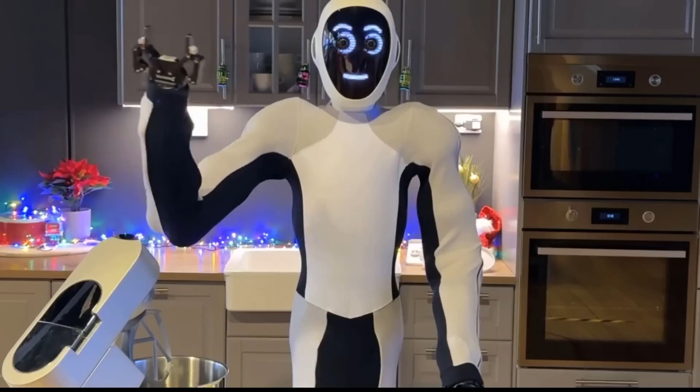A humanoid robot company backed by OpenAI called 1X Technologies just announced a breakthrough showing their robots can now do tasks autonomously. Its robot named Eve can now take more actions thanks to special neural networks, which allow the bots to learn by watching videos of people doing activities. From this, Eve learns to copy the activities on its own without needing complex programming. What's very interesting and exciting is it only took 30 Eve robots to train the bots to do these tasks autonomously. How big of a deal is this?

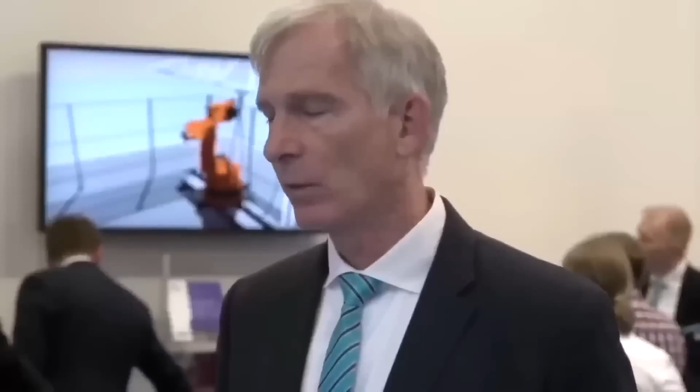So every week almost, we do a bot video. We're seeing these bots, all of them, continue to drop videos showing that they can now learn things autonomously. This is something that seems to be happening more and more.

So here's the news, right? 1X, they are a Norwegian company, right? From Norway. Funded $100 million, of which one of their funders is OpenAI. And they dropped this and they just said: all neural networks, all autonomous, all 1X speed. They didn't speed it up. This is all autonomous. There's no teleoperation in this video. They had trained it to do all these tasks.

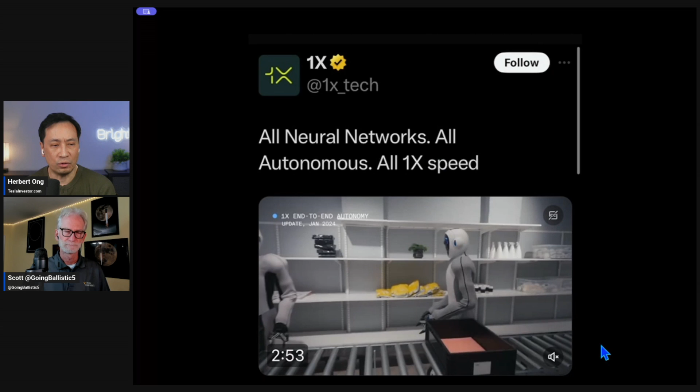And this is Eric Jang, he's the lead VP of engineering for that company. And he said, every behavior you see in this video is controlled from pixels to actions with a single neural net architecture. So there's no coding. This neural net learned it on its own after it was given videos and teleoperations. Now in this video, there's no teleoperations, no scripted replay or task-specific code, no CGI, all in one continuous video shot. I'm going to go ahead and play this video, and while I do, please tell us what we're watching.

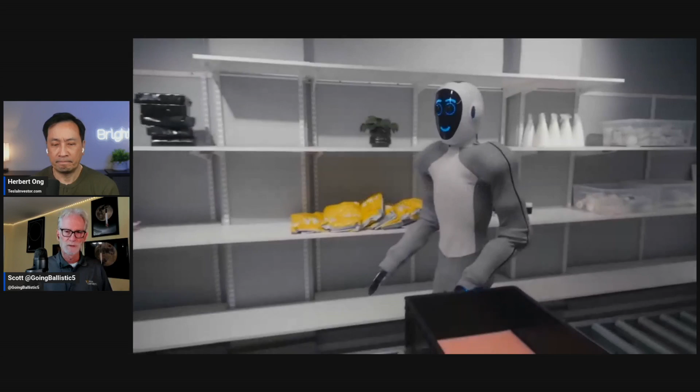Okay, so the first thing you see here is a very simple operation of being able to move parcels in and out of different pallets on a conveyor system, get an idea of the functionality, reasonably smooth, and you see it's got the mobility that's needed for a task. Now, if you just pause for a second right here, the first question that came into my mind was, oh, okay, I see just a couple of bots. But then as the shot turned around, it's like, wait a minute, we're seeing a lot of bots here. So what we want to do is get an idea of how many unique robots there seem to be out here that they are using to train, because this is probably one of the largest collections of humanoid bots that we have seen in one location.

And that's very important to the training sets. So the other thing I want you to notice about the operations is that what they're doing requires a lot of turning your back and going in another direction. So it's not like everything is just shifting a little bit to the left or right, but they've got to turn around, get something with the back, come back and forth. And as I've looked at the mobility of a lot of the humanoid bots that are bipedal, a lot of them have not convinced me they can turn really quickly.

They are still kind of slow going straight ahead, but they seem to be slower when it comes to being able to turn. So in this case, having a mobile base, which is wheeled, they're able to do that movement a lot quicker than you're normally able to do. And of course, it makes it a lot easier for them to do the mobility and the navigation that's needed for a humanoid bot. So they've decided, okay, we're going to forego figuring out how to do the walking bit first, and let's work on having a mobile base. Now that limits you, right? It means you have to be on a level floor the whole time. So let's continue on, let's take a look.

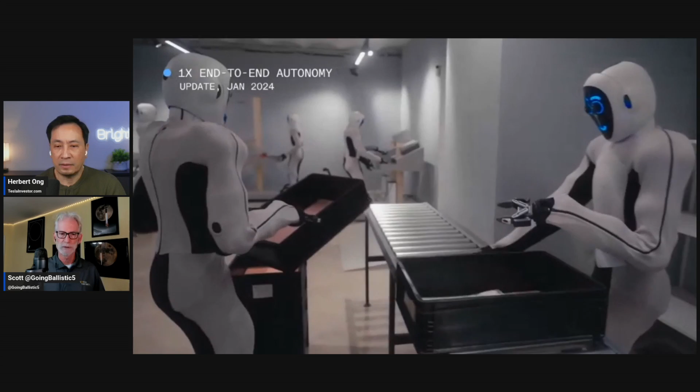So we'll go ahead, we can see they're learning to do those operations. Now if you pause for a second, I just said aha, a level floor, right? Well, you can put ramps in here and it's able to go up and down ramps. So you won't be able to have steps, but you might be able to reconfigure your environment to have slight ramps like this if it needs to go up and down.

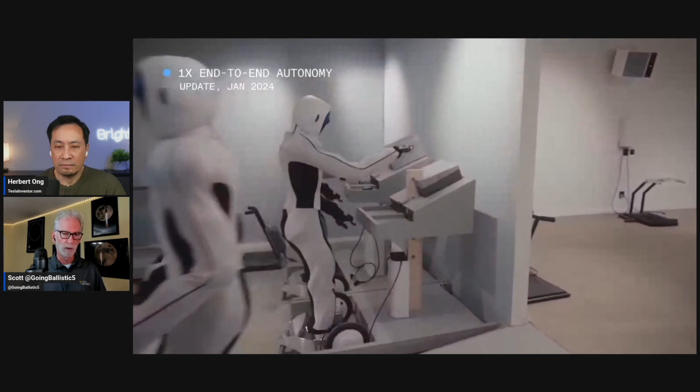And we see later on there's elevators, so there may be a lot of situations where it's okay to have robots that are on wheels moving around. It doesn't require as much power. And you see they've got kind of a clever solution that I'd refer to as being kind of like a snowboarder. Your feet are kind of trapped in there, but you still can go up and down if you need to, which we're going to see here.

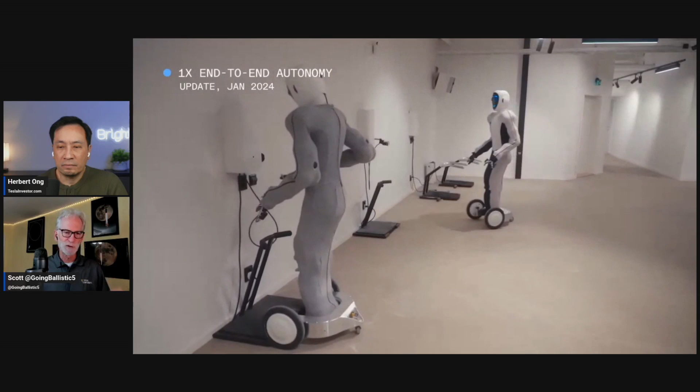So at first, everyone thought like I did, it's like, oh, they're over there doing spinning or working out, right? No, they actually are recharging and they're able to plug themselves in and out, and you can see they can use the legs to adjust the height as necessary.

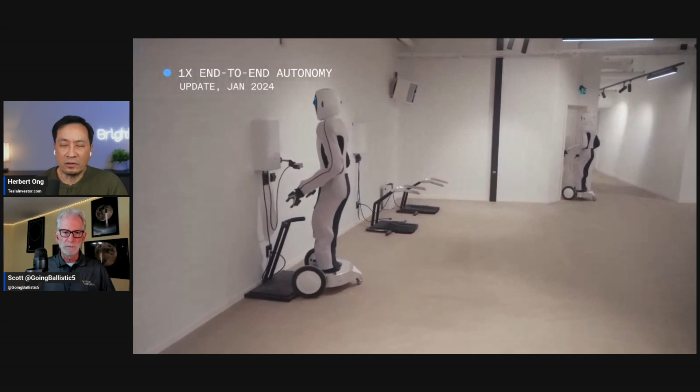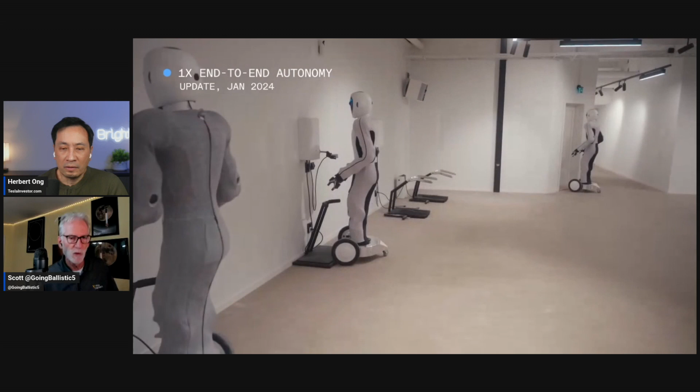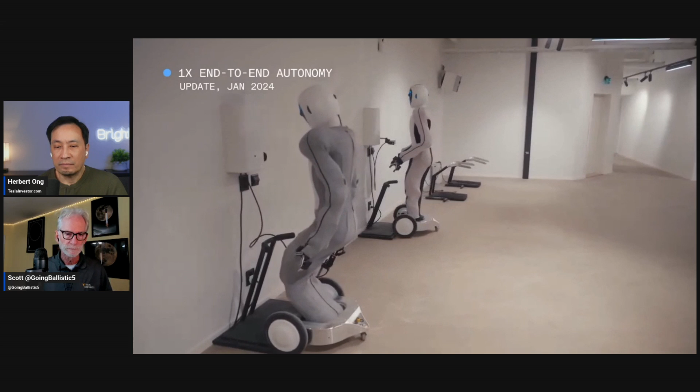What are they plugging into? It looks like just a standard outlet. Is it the hip? It's hard to tell whether there was something down on the base of it. I'm not sure if it's plugging in at the base of the wheels or whether there's somewhere else on there. But I had a feeling it's down low because that might be where the battery pack is. That would make sense, to probably put your battery pack down low because that means your center of mass is really low, and so you have a lot more stability that way. So there might be something down there. Yeah, it looks like something is clipped in down there in the bottom, by the wheel.

So we can see that they're able to self-charge. And then we have another room over here.

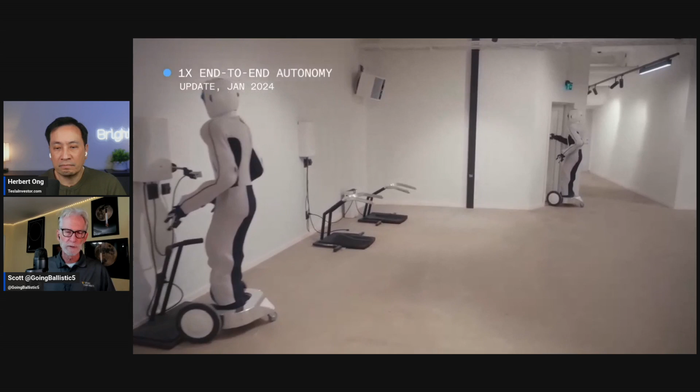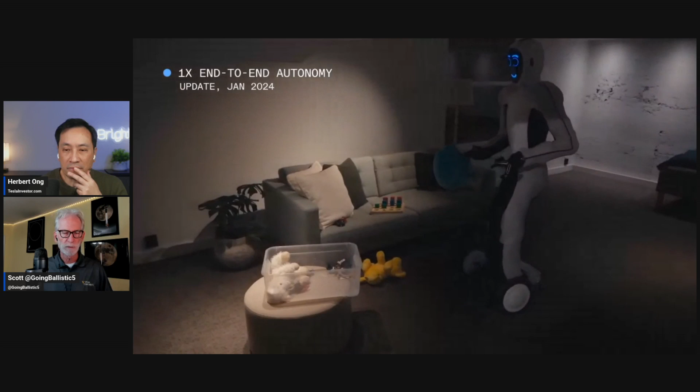We expect they're going to be doing something very simple, and you go in there, and I think there's a little bit of a surprise. It looks a little bit more like a bedroom. If this is the one that I remember, yes, over here. So we have a living room or a bedroom where now we need to pick up things off the floor. So it does show the ability to go down because it is partially legged, even if it's not using the legs to walk, to identify different objects.

And again, they're saying this is end to end, pixels in, motion out. So they've probably also figured out some of the same tricks that a lot of the other AI companies have regarding VLMs being able to do training with vision language models of, like they said, video in for training sets. And a lot of different tasks that we see going on here.

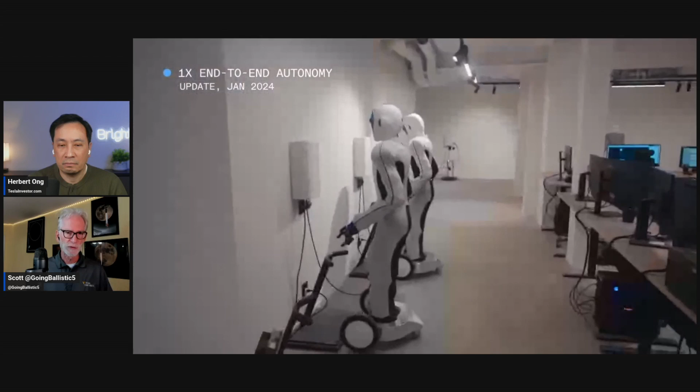I think over there it was going up on an elevator. Again, we can see some of these doorways have ramps on them to allow them to go up and down as necessary. Actually, I'm not surprised to see these ramps because in Scandinavian countries, a lot of the offices, the way they're set up, they usually have a little step in between to prevent drafts because it gets very cold. So you get used to that, like when I'm in Finland, Sweden, walking around, sometimes you almost trip going through the doorway. So they probably had to make a ramp just for that in many cases.

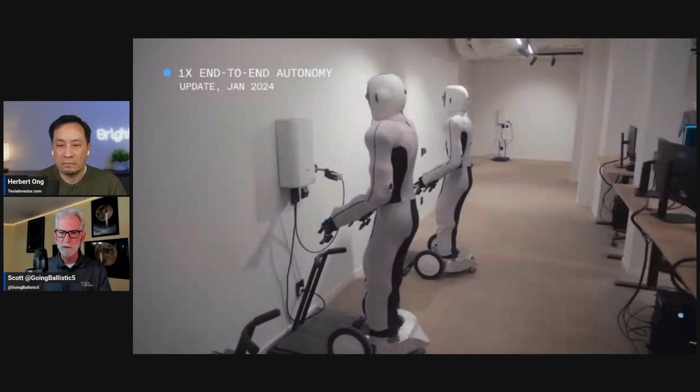Okay, so again we're seeing what looks like another room there, this office space, a lot of chargers around there. So it seems like maybe they need to charge frequently. I don't know how often, how long they can run. But in some of the workstations that we're going to see where they're doing these tasks, they are plugged into the wall. So they are showing us a couple of modes.

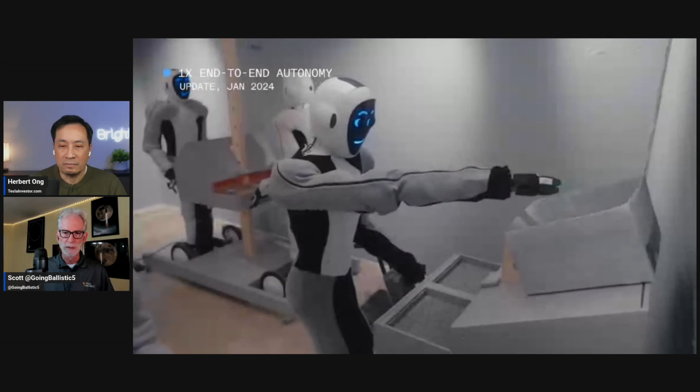One where it's able to run around fully autonomously without being plugged in. And in some cases, I think down here, they may actually be plugged in while they're continuing to do this. This is an interesting kind of what I would just call a Sisyphusian kind of task of constantly rolling the ball uphill and then it only comes back down again. You got to do it again and again and again. But that's where they're getting more and more of the training sets.

And I did make a little pun about the name because I said it was at 1X. And I said, of course, you would expect nothing but 1X from 1X. So I could remember the company name, I kept on getting it X1. It's 1X. Okay, it's 1X. So if you want to remember the company name, that's one way of doing it.

But it's important to see that that is the normal speed. It seems you're not super fast, but let's just say it's able to do the task close to what you would expect from a human. Especially if you're doing the same task repeatedly over an 8-hour day, you're not going to be going full out, full out, full out.

So the first thing I wanted to figure out was, this is the first time we've seen a lot of robots training, because the expectation is you're going to need a lot of real world data to improve your training sets. I counted, I think like 24 robots when I went through that scene, but I wasn't sure how many of them I double counted. I may have double counted anywhere from 4 to 6, so maybe there were 20 unique robots in there. Everyone else can do that at home, go through and see how many you can count. But it is a fairly large number, and it means they are trying to capture that real world data.

If you remember, we had a nice discussion with Suzanne Gildert from Sanctuary last week, where she explained a little bit of the process they're doing. There's a big difference between the simulated data and maybe even the telerobotic data you'd be using in your training sets. Then when you deploy it on the bots, because when you simulate, you're in an artificial environment where the physics are simulated, not real world physics. That means you get close to your solution, but it's not perfect. You need to go out there and refine the model by doing a lot of reinforcement learning on what you learned from the simulation to make the model a little bit better. It looks like that's probably what they're doing there.

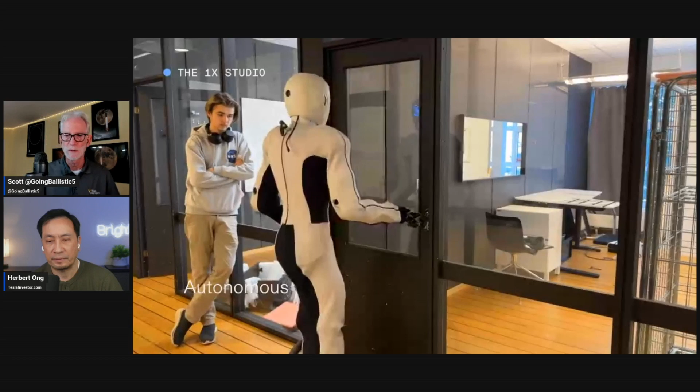So talk a little bit and I will show video of other video that they've dropped in the past. Okay, so I think this is one we saw maybe close to a year or so ago when they first announced their partnership with OpenAI, because no one had really known of 1X except probably people who were very close to it. They were almost in stealth mode, and now we're starting to see more and more of these updates.

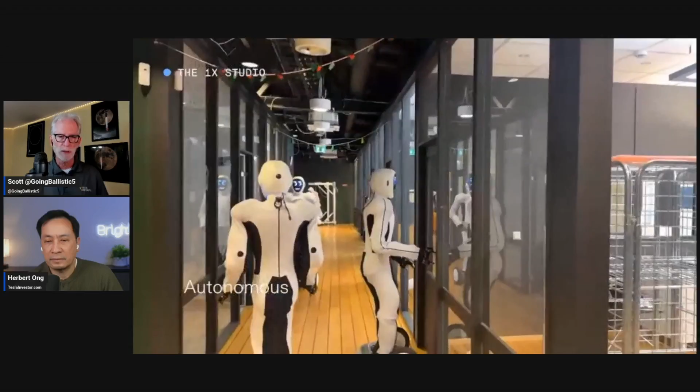Because I've wondered what they've been doing in the past year, and it looks like they're coming up with a similar approach that everyone else is. They're doing end to end. They're beginning to find that the way to train these is also very similar, in that vision in, and then the motor profiles out, and exactly what the actions are supposed to be, with very simple training sets. And it's very similar to the results we're seeing also coming out of Sanctuary, and also I think Figure with the demonstration they did with the Keurig. So they're all beginning to realize it's really feasible to start training these bots.

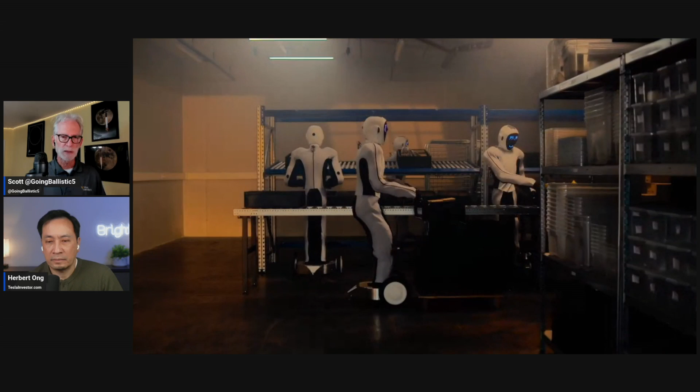And what I think is probably important here is that some people may say, well, okay, it's a very simple bot, it's not really walking and this and that. That's not so important. What's really important is that you can train these things. If you're able to get the brains together, the rest of it is something you can take care of later on. Now, it helps to get something that's maybe closer to the human form factor to be able to do it, but it's probably close enough.

How much effort do you put into the hardware? How much effort do you put into the AI? They put just enough effort into the hardware to start collecting data. And as we can see, it was able to operate in that sort of factory warehouse environment pretty well, going around.

And what we haven't shown there, and what we've seen a couple of posts of, is they have a new robot, which is called Neo—does mean new—that has what looks like fully formed hands and bipedal legs. So it will probably—we haven't seen a demonstration of it walking or anything else. They did show grabbing a coffee cup. So it looks like they finally have that. So they recognize that those old claws, that's not going to be the final form, that maybe the wheels is not going to be the final form, except in some certain limited use cases.

The main thing is that they seem to be coming up with similar results as everyone else. And that excites me to see that they're all being able to say, hey, this approach we're taking seems to be giving pretty good results, and giving us good results very, very rapidly.

Yeah, so they can train it. That's key. But like you said, it just has the pinchers now, and everything we saw is great, but it's pinchers—pinchers are limited. But you're saying that yes, they have Neo, but it's going to take a lot longer, I would guess, for them to figure out the hands, because they're probably nowhere near.

More retraining—I would think that they would have to go through in that, but they may have the architecture together to realize this is how we get the data in and data out. But the real thing is that it has to understand what the hands are doing now, so it's going to be a bit more complex task. It's going to be a lot of rework, like what we've seen before with even FSD and others, that if you start changing the automobile that it's in, we need another set of training sets in order to get this end to end to work. But it's sort of exciting to see.

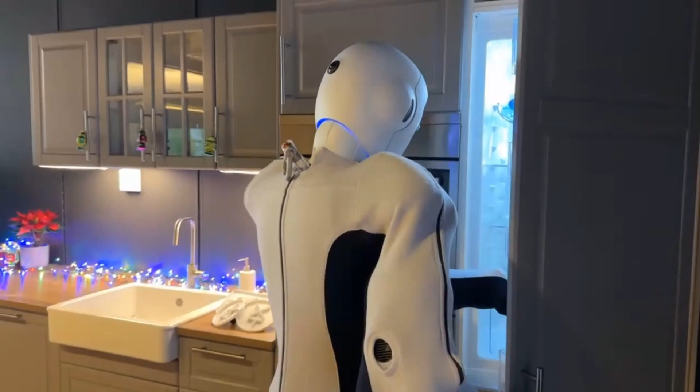Once the dough is chilled, preheat the oven to 350 degrees Fahrenheit, or 180 degrees Celsius. And line baking trays with parchment paper.

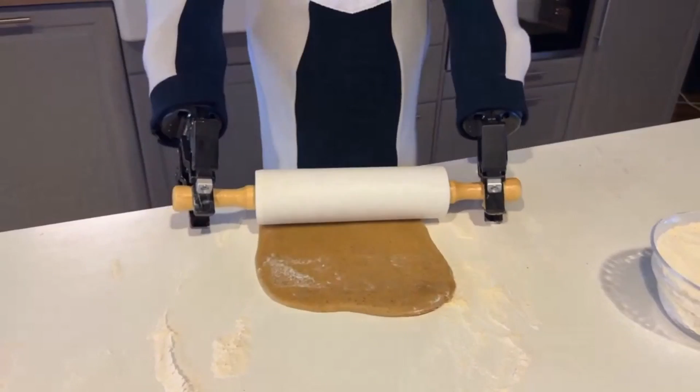Lightly dust your working surface with flour, and place your dough. Roll the dough down using a rolling pin. We're aiming for a thickness of about 1/8 inch or 3 millimeters.

Next comes the really fun part, where we cut the dough into figures using cookie cutters. Transfer the cookies to the baking tray, leaving some space between them.

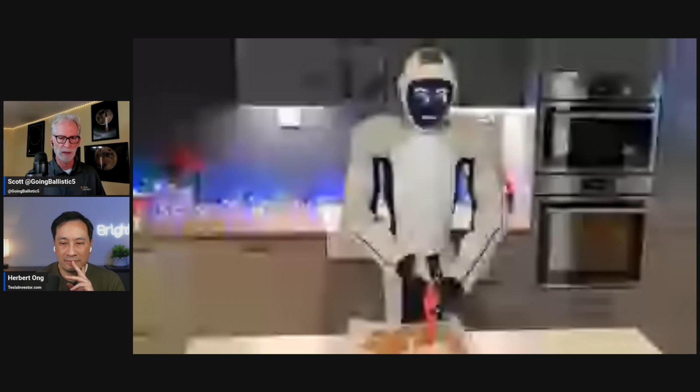I recognize them, I've had to model them in the past, and every now and then you might see a close-up glimpse that you can look at. This is a company out of Quebec that makes end-of-arm tooling for a lot of cobots. So it's kind of like the go-to solution in many cases for these kinds of applications.

Because they're these nice little parallel grippers that you can also control the pressure on. So if you were starting a research project, that would be a really good gripper to go with to begin to do the demonstrations.

So I'm assuming they're just doing this to get the proof of concept of what the AI architecture is going to look like, and to have some arms that either they may have built themselves, or it's also possible they've been using some cobotic arms you can get literally off the shelf, and then just tapping into those control systems to get an idea of what will work and what won't, and what your AI architecture is going to look like.

So if I was doing a project similar to this and deciding, okay, what's going to be important? It's going to be the brains, and can I get the brains to control something? Can I get it to control something simple? And if I can't, then I might just give up and say, okay, it's not a valid research project.

But if you're able to actually get something that can do this, and if it's able to do it autonomously, then that tells you a lot. If it's not autonomous, then you haven't gained a whole lot of information except to say that with a really good neural net we can get a lot of functionality out of very simple grippers. So that's kind of what it tells you moving ahead.

What I'm not sure is that when I look at that end-of-arm tooling there, it seems to be different than the ones we're seeing in the other video. So I think if we try to compare the two, they may actually be different.

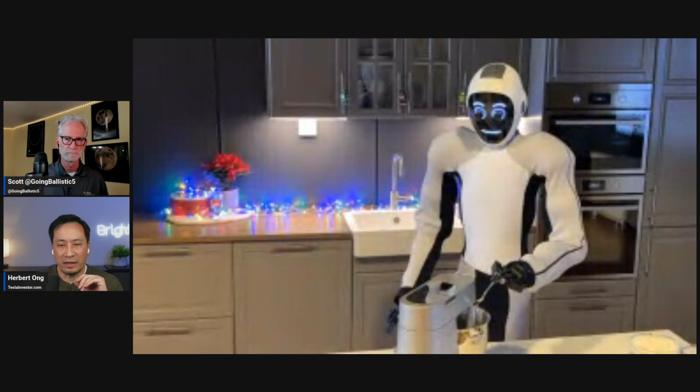This is Gen 2, Gen 3, where you don't see wires sticking out, you don't see bulky actuators. I mean, they have huge shoulders here, but with the clothing that they put on, it looks clean.

And then what do you think about the head? Just trying to make it more happy with the big eyes and smiling face. That's a big question of what kind of face you want to put on there. Do you want to do a display like this or not? And that's, I guess, personal taste, and whether you use that to communicate. Some people like those things, some people don't. It's not quite uncanny valley, fortunately.

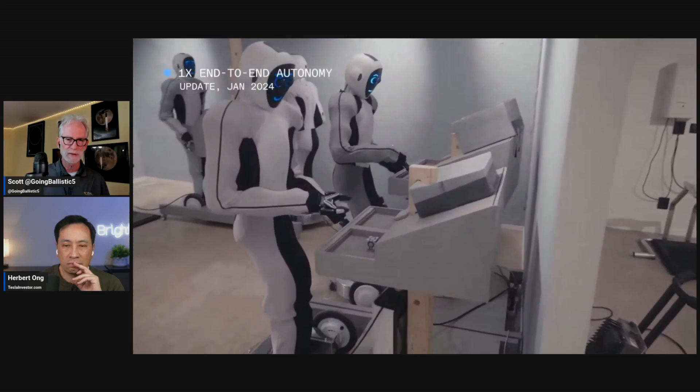And then the other approach that we've seen, sort of Figure and Tesla Bot take, is a bit more Terminator-like, almost no expression there, emotionless. Yeah, so like I say, it's just going to be personal taste.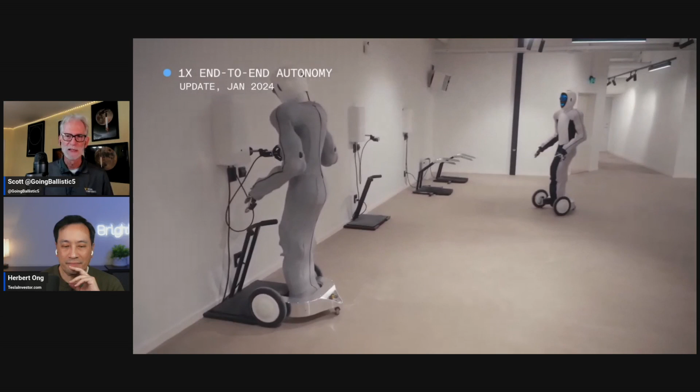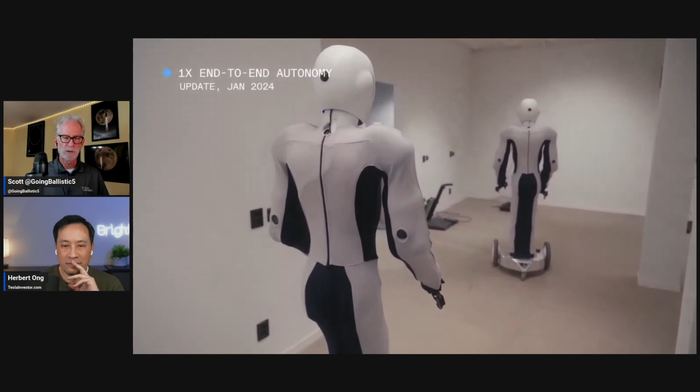And they've probably felt that by putting something on there, it makes it more accepting in an office environment, or if there's going to be a lot of coworkers, which is my expectation, that it's going to be a while before you have a factory that's purely bots. They're going to be working side by side with humans, so you've got to do something to make sure they're socially acceptable, they're able to communicate, and you get an idea of what the bots are doing. It's a lot of the reason why the movements of the bots have to be extremely similar.

So again, if you look at the hands there, they're different than what we saw in the other video. They're definitely different. I think about a month or so ago, there was a picture they posted of the arrival of these bots, so they were unpacking them, wherever they were being assembled, they finally arrived. So they probably decided that they were going to come up with a different design for the end-arm tooling or the grippers, the hands that they have here, versus what they were doing originally, which may have been more of a research project.

Okay, so I'm going to play a video of Sam Altman of OpenAI talking about OpenAI's strategy. We know that OpenAI has invested and partnered with Figure. We know that they partnered with 1X, right? Yeah. So let's take a look at what he said, but let's listen a little bit to what he's saying. This was just a very recent interview that he did with Bill Gates.

Started investing a little bit in robotics companies. I think on the physical hardware side, there's finally, for the first time that I've ever seen, really exciting new platforms being built there. And at some point we will be able to use our models, as you were saying, with their language understanding and future video understanding, to say, alright, let's do amazing things with a robot.

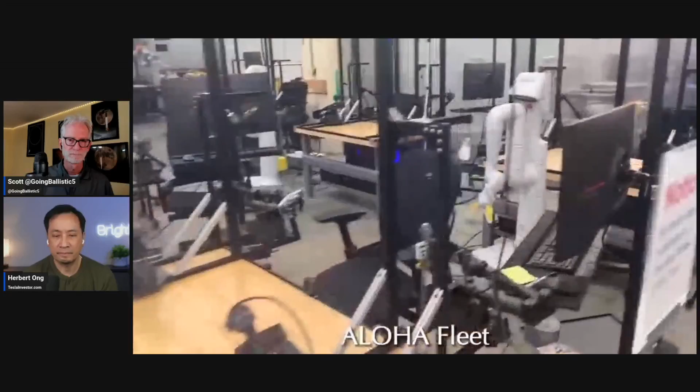Well, it looks like they do have quite a few in there, and you can see the teleoperators are becoming very skilled at doing very dexterous tasks. Being able to throw and catch something is rather interesting, and if they did it enough times, it'd be okay. There's some incredible dexterity, like being a pickpocket, everything, including returning it to the pocket.

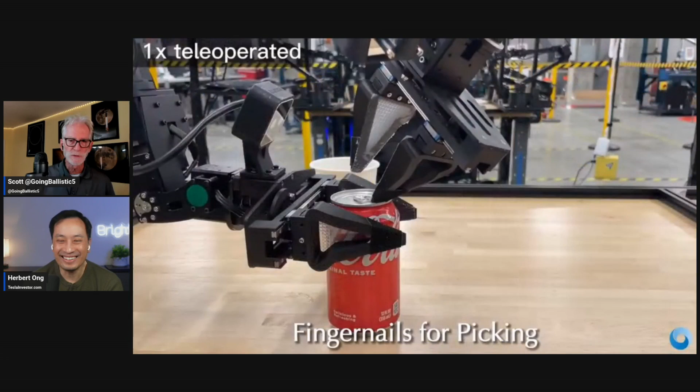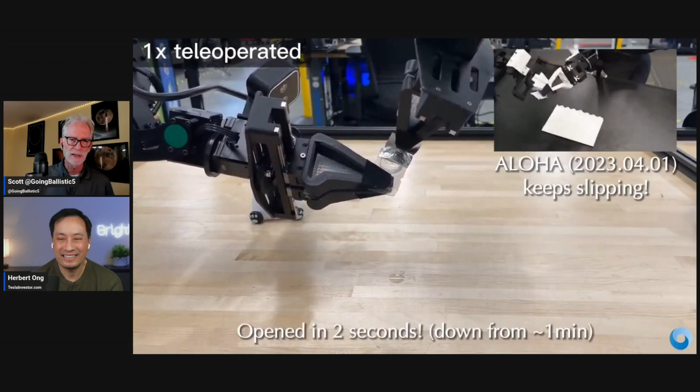Yeah, so it shows that again, not the best fingers or hands, but you're able to do a remarkable amount of stuff just because you have a really good neural net that is controlling the system. In this case, it's a human neural net. But if you get enough training data and it's able to replicate this, that will be amazing to see.

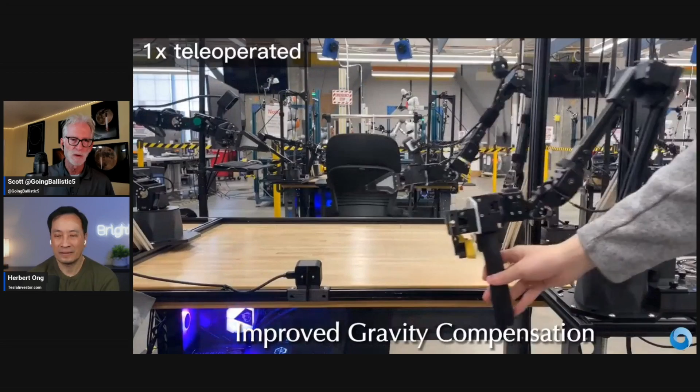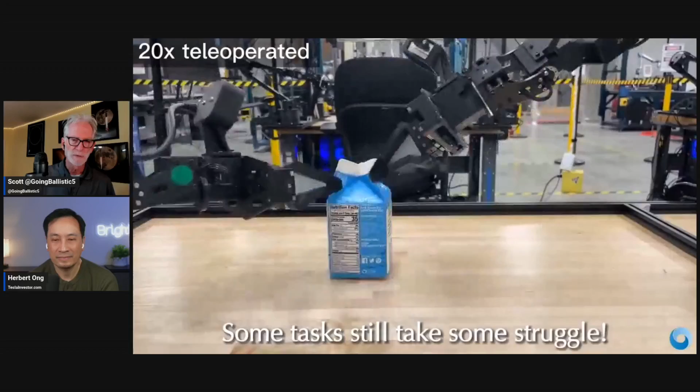So they've got a fleet of these things. As we can see, there's not just one out there, there's a lot of others, because they refer to it as being low cost, and these arms are not being built in their lab, but are commercially available. There's a provider these arms are able to get them from and put them together. I think the total cost of the arms might be somewhere around $30,000 for the setup. That means you can scale that quite a bit and get more and more training data.

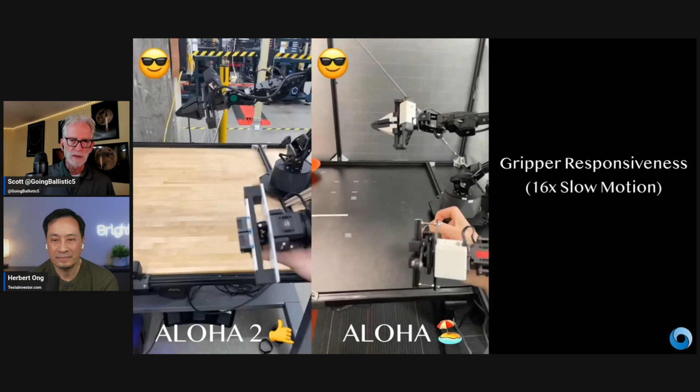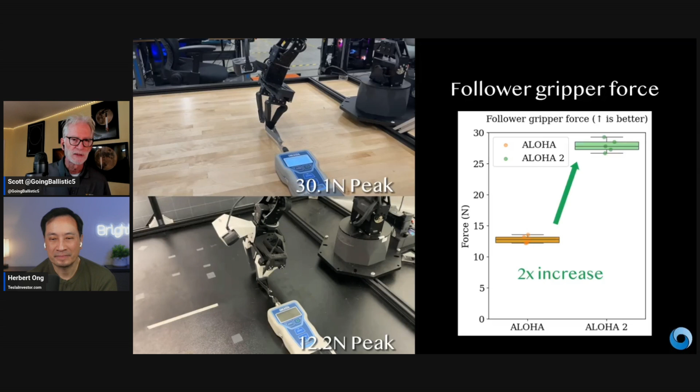The main thing that I think is impressive is how skilled the teleoperators have become at this point. It must take a while to learn how to do that remotely and get an idea of the finesse that sometimes has to be there. A lot of that finesse, of course, comes from our hands, and they've probably got a little bit of feedback from it, but you're not getting full feedback. Quite a lot of it is really going to be coming from the vision system.

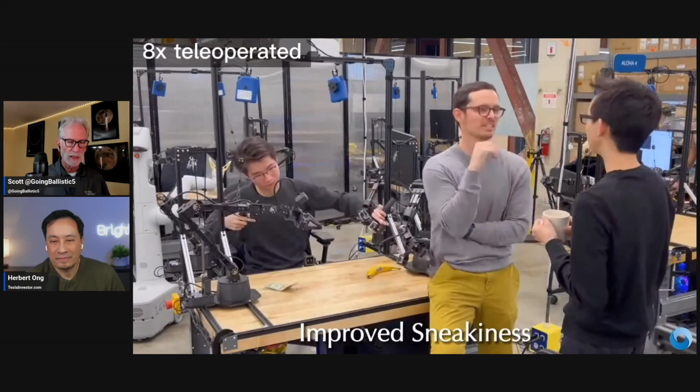How much you're able to do just from looking at it to understand it, because we as humans really understand the world quite well, just purely with vision. And from that, we're able to change and adapt what our bodies need to do to achieve the particular goal that we want to have.

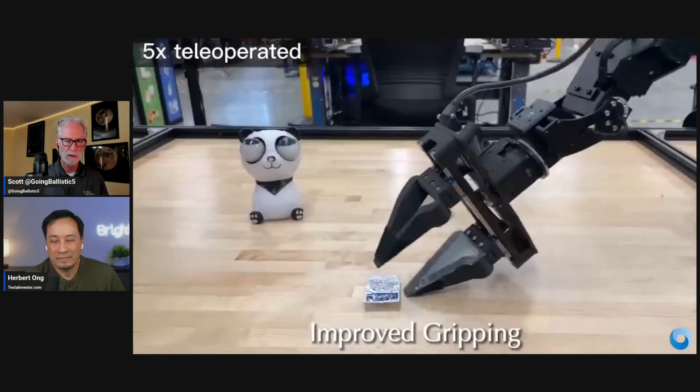So I'm wondering if they probably have a good vision system attached with this as well, so it also understands what it needs to do to make those fine little maneuvers. In this case, I think that looks like for contacts, right? So you're dropping in some contacts there. That's not an easy thing.

Now, can I ask you something? You keep seeing these things as 1 times teleoperated, 5 times teleoperated, and I think they're just showing the grippers, how they improve the grippers. They have a little bit more fingernails, a little more. So 5 times teleoperated, what does that mean?

5 times, so they operated 5 times, but it's being teleoperated right now, isn't it? Or is this an autonomous situation right now? That's what I wonder, if it only took 5 shots. In this case it looked okay, in that case it's more complicated. So maybe after a training set of just 5, they're able to do it. The other one looks like it was kind of 1 shot.

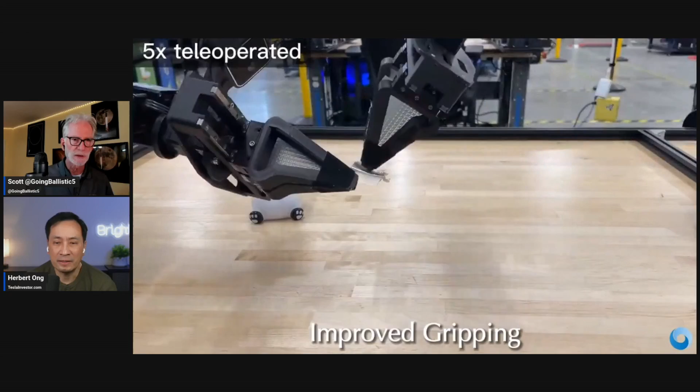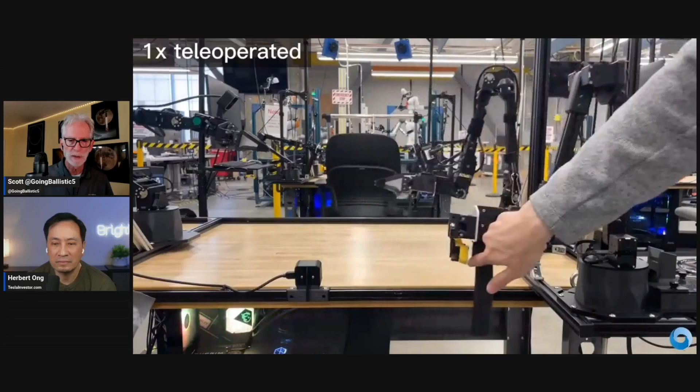So 1 time teleoperated, I'm not sure what the activity is they're trying to do there. They are showing how you have the arm which controls the other arms remotely. So 20 times, so it took 20 times to be able to teach it to do this particular task. Yeah, I don't know.

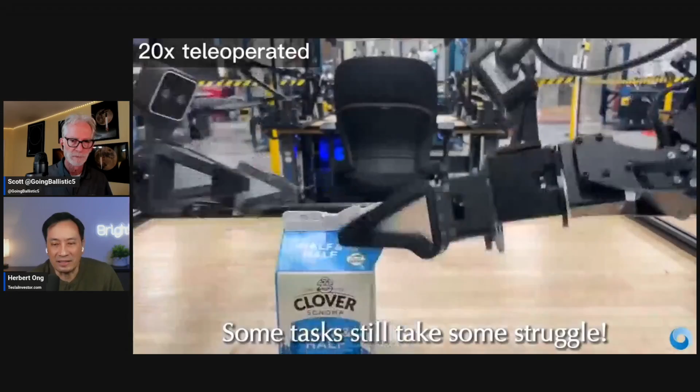I don't trust it. I don't trust that this is what we're watching is autonomous, because everything else is, look at this, they say 8 times teleoperated, right? 8 times, then 3 times. What are they talking about? Because you got a human here. If it really works, it would be able to pick the pocket after 3 times.

I'd like to see it run autonomously. They should have shown it without the human doing it. Otherwise, it's a human doing all of these tasks. I don't understand what I'm watching, honestly.

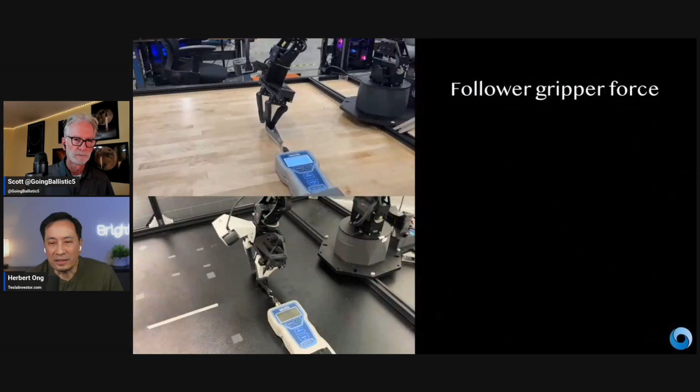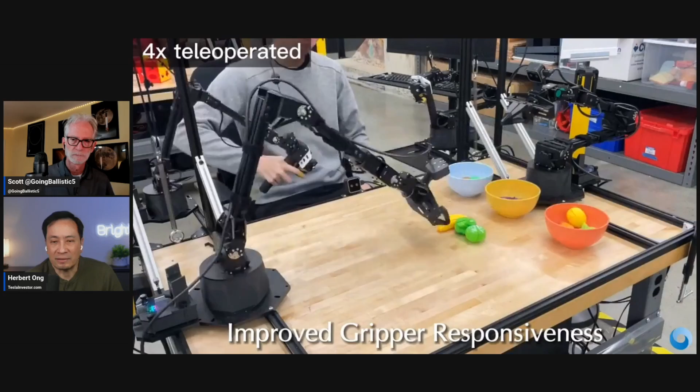If they were able to do that in just a training set of 5, and then it was able to do it autonomously with high repeatability afterwards, that would be impressive. Yeah, so they did not say anywhere here that something's being done autonomously. I mean, obviously in the previous videos, they did, right? When we watched the previous videos, they showed that after it being done 50 times teleoperated, it was able to then do the task. Now I don't know what this is, because, you know what I mean? I don't understand. This is teleoperation right here, what we're watching.

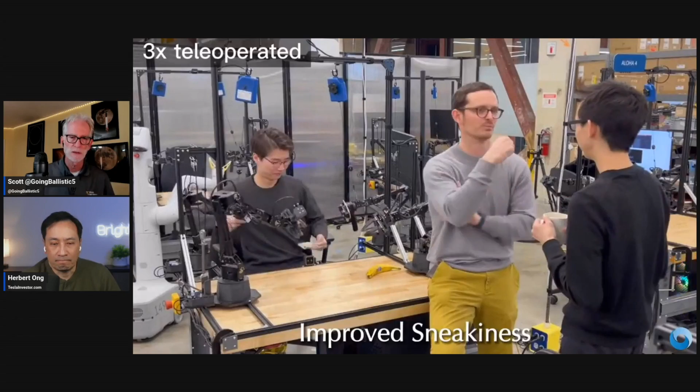So I wish that they had done this and then showed it being done autonomously afterwards. Otherwise, I'm not sure why they're not showing us autonomous. Yeah, I agree, it's hard to tell, and you could only tell from that vantage point. Some of the others we're seeing here is one time teleoperated, and then was it able to repeat the task after just one shot?

Yeah, okay, and I guess the point being that we just said, here's 3 grad students, you will love this, grad students, PhD students from Stanford, funded by Google DeepMind. They're just trying to say that, hey, we don't have to be that expensive. I can create a very cheap, simple thing, in this case just robotic grippers, but it can do so many things autonomously after we've trained it through teleoperation. That's why they designed this thing to be very set up to be teleoperated, then they let it loose to do things on its own. They're just showing that you don't need to have fancy robots to do something useful. In this case, they're showing things at home.

Right, and I think that's part of the point, is they want to see the absolute minimum that you need, like some form of mobility.

You can either make it legged, or you can put it on wheels or a cart, which I think is what Aloha does. You need to have 2 arms, and you need to have some sort of gripper. Doesn't have to be a full hand. So that's the bare minimum of what you need. And even their arms are only 6 degrees of freedom. They're not like full human arms, so they're lacking a little bit of that.

And then a camera system. Then if you have that, now you're just trying to demonstrate how good a brain can we come up with. Again, if you put a really good neural net in there, i.e. a human, that means you can do some really remarkable things with really lousy fingers.